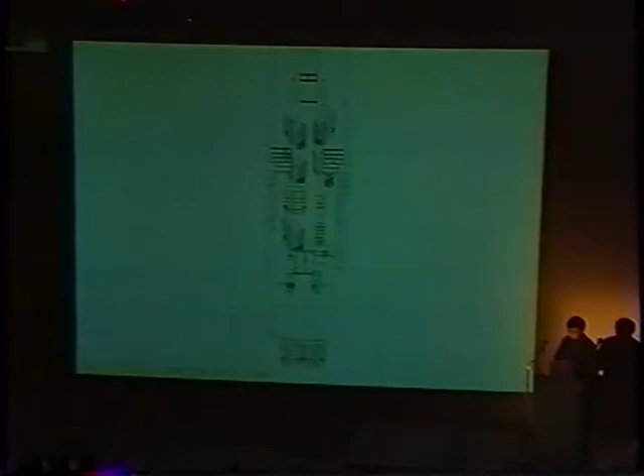This is a bookstore we did using a similar way of thinking, starting the project with a program. Since it was an interior design project, we looked at the old drawings and found out the space we used for the bookstore was originally meant for traffic.

So what we did was put traffic back into the space. We had bicycle wheels put onto bookshelves, so they were nicknamed book bikes. This is one of the details. One of the biggest problems we have in the office is doing nice details, but this one is so far the best because we didn't have to do anything—they were bought off the shelf.

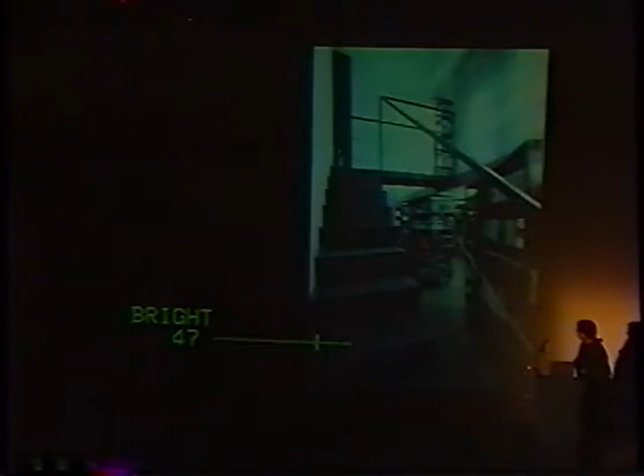Here are some interior shots. The pivot in the middle of the book bike is actually the column supporting a mezzanine. So you can go upstairs to the mezzanine level, and there are lighting fixtures there and in the walls, so it becomes a big lantern in the bookstore.

The book bikes revolve when the bookkeepers push them, so they're able to reorganize the space inside. They were even used as the door of the bookstore.

A little over a year ago, the bookstore was demolished to become a real passageway for bicycles and cars. So for us, half of the bookstore is gone—half was books, and half was traffic—and it's still there, or we like to think that's the case.

Here it's a similar idea, not with bicycles, but with how people may use the space. This is an office for an American diesel engine company, and it's a critique of cubicles. We decided to fully take advantage of the open space. The lower half of the office is opened up by dividing it with clear glass, and the upper half with translucent glass. So when you sit and work, you can see the entire office through the window. When you get up to go to the bathroom or get a cup of tea, you have some privacy.

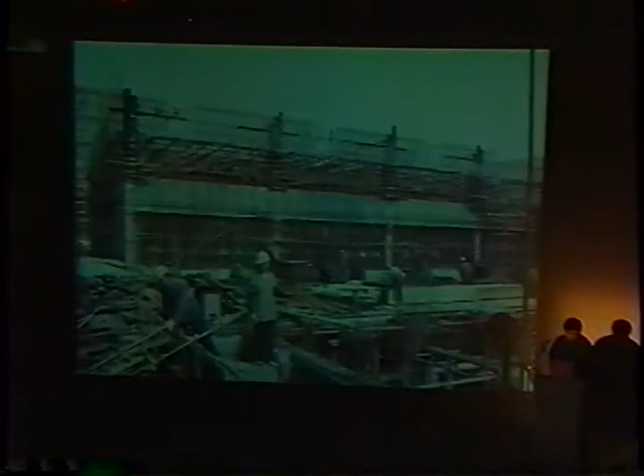And then we could develop urban spaces again. This is a garden which also serves as a fire escape. So now it's under construction. You don't see much of it yet, but this is the basketball court. It's already topped out, I just don't have the image here.

So here we're onto site. Site is, of course, terribly basic in architecture. We are taking on the issue in a number of ways. This is a renovation of a building which is not quite finished. Something happens also very often in China - an old building means a building built maybe 5 years ago. In this case, right before this residential block was completed, we were asked to redevelop the first floor into an office.

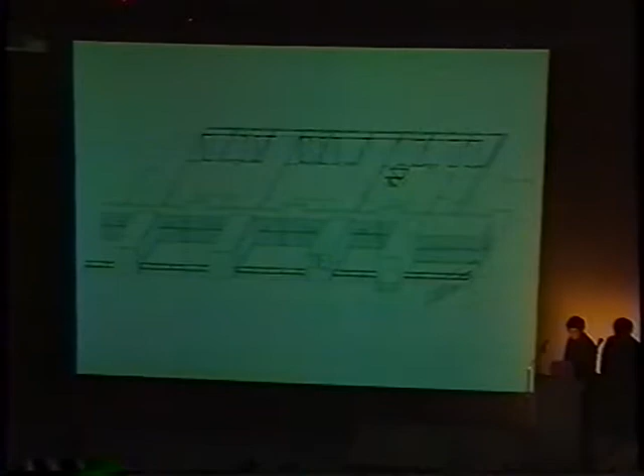So as a residential block, there's a gap between the street, the sidewalk, and the building, and there are bridges to enter the residential block. Since it's now an office, we tried to bring the building back onto the street by turning the bridges into a showcase office. This is an office for computer rendering.

Their clients are architects. So the idea here is the office would be where the client meeting would be held. When the client is looking onto the computer here, passers-by would have a chance to see the beautiful image on the computer, and then they would go in and order one themselves.

That, of course, really never happened, because there aren't that many architects going by there anyway. Instead of changing the building, we also added pretty much a skin to the building - perforated aluminum panels. Behind it, you can still see the original window and air conditioner unit. And you can see here the gap, and this is part of the bridge structure.

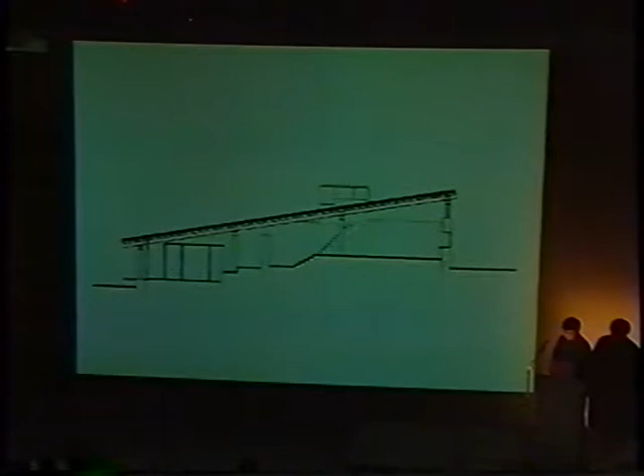And here, site is about topography. This is a house we did in '98, on a hillside. In fact, it was a farming field during the 1970s for a while. We understood that the reason the client wanted to come here was to be with the really spectacular landscape.

So our building, which is here, is about how to bring the people and the landscape together. We kept the different levels of farming terraces inside of the house. And then on the outside, the big roof, in fact, has the same slope as the hillside, which is 11 degrees.

In the courtyard, and on the inside, we had a number of little buildings, mini buildings again, which are serving as the dividing walls. This is a 1.8 meter wide wall, but the inside is carved out to be bathroom, storage, fireplace, and so forth. These are the staircases going to 3 guest houses, like cubicles - if you remember, you actually saw them early on. See the different levels inside of the house.

And then from those penthouse guest rooms, you have a view again of the landscape. That was winter, the previous shot, and here is summer.

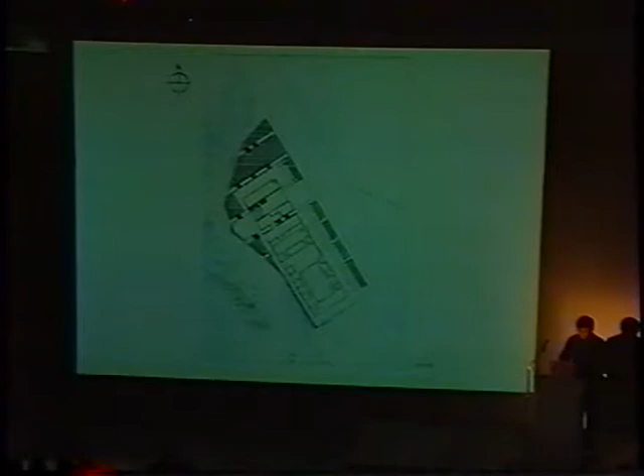In this case, the site is right on the Yangtze River bank in Chongqing. Our site, when we got it, had already been totally flattened. We were asked to set back from the river for a biomedical research and production facility. So this is a view from the river.

What we decided in this case was to engage the river, or the topography, only in certain places, or rather say in certain sections. So these are the view tunnels as well as pedestrian access to the river. Because of that, we were able to convince the client to take out the typical wall periphery and the gate, becoming one of the first - actually the first - open complex in the area.

And then again, we offer some views through, on the first ground floor only. This is the production laboratories, and then research laboratories on the upper level. And this is the riverside.

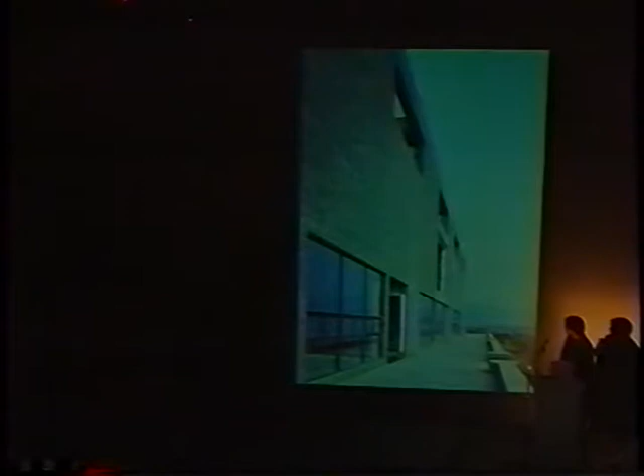And here are one of the courtyards on the top level. For us, this is just one layer of the artificial topography. And that's inside of the lab. There's actually a real person working there.

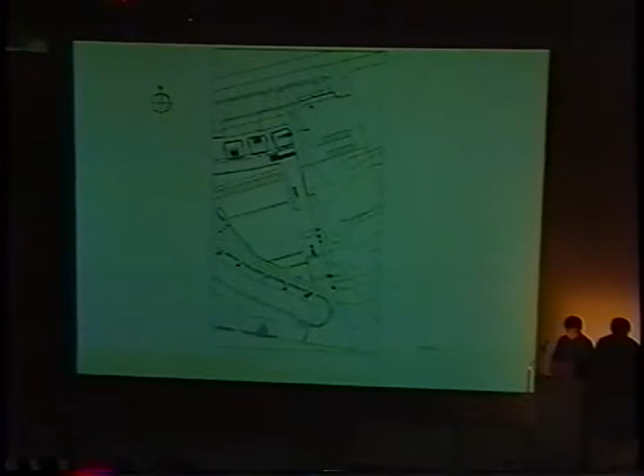So the next project is in Qingdao, a city everyone here must be very familiar with, where the beer is from. The brewery is not far from here. Our project is on this hillside facing the ocean. It's part of the Pacific Ocean, but this immediate area is called the Yellow Sea for us. The building, the conference center for Peking University, descends from the access road all the way to the ocean front.

There were 5 so-called villas of the European classical style, which is a lot more awkward than these buildings here. They were abandoned by a Hong Kong or Taiwanese developer, I don't quite remember. But we came in and tried to make them part of the facility as well as part of the topography.

So that's the building per se, and the staircase on the terrace roof takes you to the ocean. These are the one-time villas with faked pitch roofs, ionic columns, and all that. Since none of those things were structural, we just cleaned them all out.

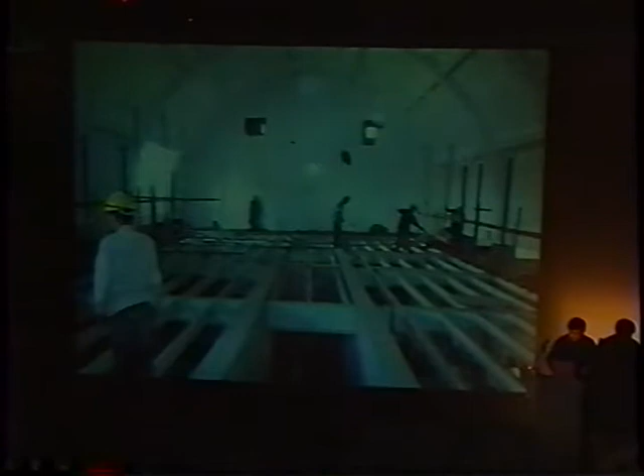So the building is freestanding, and here is the 4.3 meter gap between the existing structure and ours. The reason we're doing these concrete walls is to give enough distance between the footing of the old columns and our structure.

And here is the ground level, looking up. The instrument, in fact, is a really amazing piece of machine. It costs about $8 million, but it looks like a little boiler you'd see in a suburban bungalow.

And this is another factory we converted into an art center in Beijing. Sorry that I'm rushing so much, so I'm not giving you all the information about the social aspects of some of these projects. Like this one, the art center is supported by a government-owned developer who wants to use avant-garde art as advertisement.

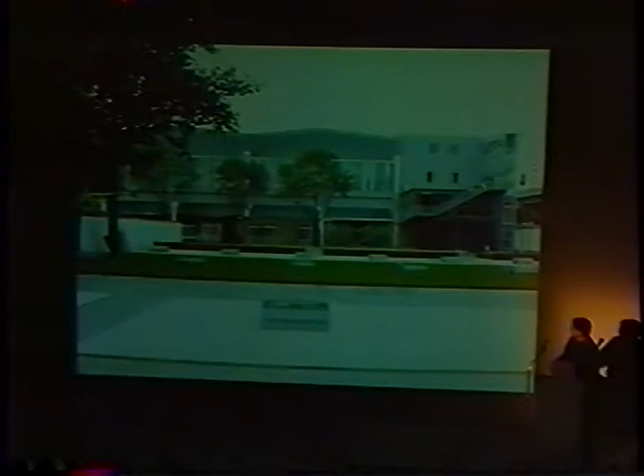And then we developed a garden, an old textile factory in this case is being renovated. Half of the factory, however, had to be cut off because a new road is being planned right next to it. We decided to keep the cut as much as we can, so instead of an elevation we had to design, we just show the section of the building.

So here it's literally a section. And that's the inside. In case you have a question, all the materials you have seen so far are all manufactured in China. The U glass channel was a German technology, but now it's made in China and very inexpensive.

And this is one of the events. It's a dance which was performed by construction workers and professional dancers. Now the developer sold out all the apartments, so I would assume that art did help, maybe art and architecture.

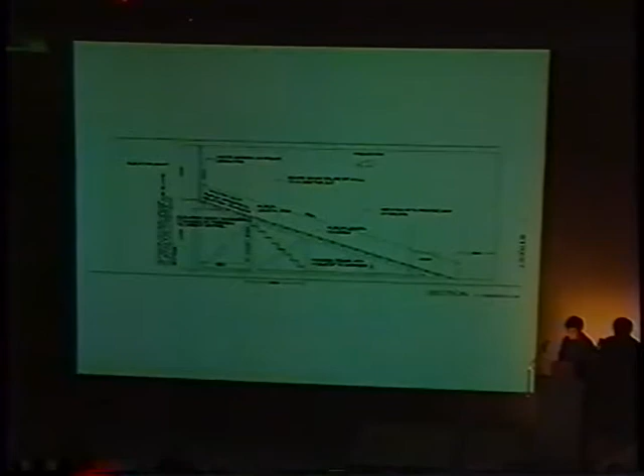And we are also interested in artificial terrain, which of course is something probably now being heavily researched and practiced in the Netherlands. But the reason we are doing it is quite different. This is an exhibition we had in New York about 3 years ago, where we in a way entertained such an idea. But the reason we are doing it in China is precisely because there are so many sites that have been leveled for, or in the name of, development.

Now we'd like to, whenever we can, reconstruct them. Of course, not only putting the soil or rock back, but using architecture somehow as a way to make the reconstruction or restoration happen. So here is the exhibition of our work in New York again, and one of the things we discussed is this idea of artificial terrain.

So that's another notion of site we have been working on. The projection shows some of our projects, with the idea of this ramp going up, so you end up going from New York to Beijing, as was the idea. Map of Beijing.

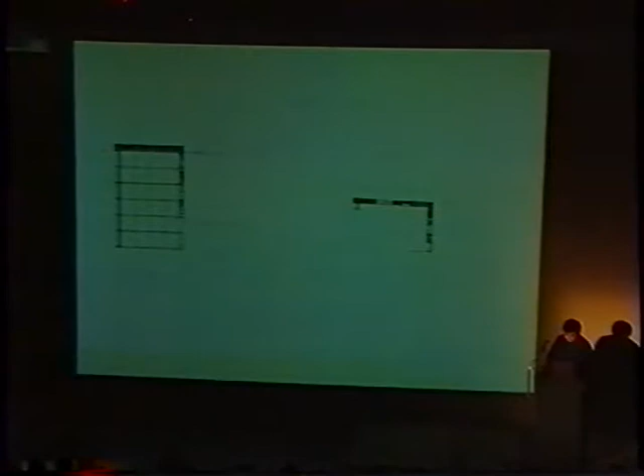Okay, I'm going to talk briefly about tectonics, and I'd like to use some student projects from Peking University as examples. We've only had two years so far, actually a year and a half. For the first year we had design-build projects. The first one was to develop a wood workshop next to an old building we occupy.

You see the students here in action, doing homemade lamination. They laminated plywood together to use for structural purposes, then put it together. There's a steel plate there in case you don't see it, because I don't see it. And so that's the finished product - a little shed.

Then the next class looked at the building and started to design the insulation for the translucent roof. That's the roof before the insulation was put in. The students decided to use emptied mineral water bottles because it would give good insulation. They tested it, it was very good, and it would still allow light to come through. So ever since, we were drinking mineral water like crazy. Once we consumed enough, they were able to put it all together.

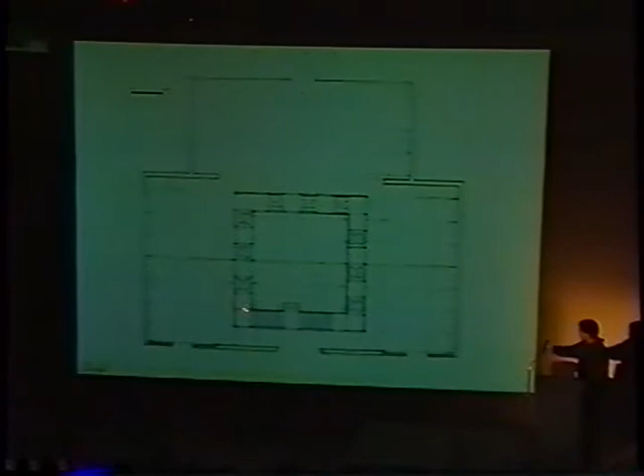So in a very simple way, we did some initial experiments in exhibition designs. This one happened at the Vienna Secession, for an exhibition called Cities on the Move. What we did was carve out, in a very straightforward way, a courtyard in the middle of the exhibition hall. All the exhibits were pushed to the periphery, with the void in the middle - this is on the outskirts, and that's inside the courtyard.

The courtyard is used for the audience in case of a performance, and it's also used as the stage and as a place for reception, press conferences, and so on. Then we cut holes on the second floor to invite people to exhibit their voyeuristic nature. This is not a real person - this is an artwork, looking at late November in Vienna. So this is real, and this is a real person peeping into the space.

We also tried to engage Chinese characters, the pictographs, as spatial diagrams. For an exhibition at the Architectural Association in London, I picked these three words not for their meanings, but for the way the space is organized in each of them. They were built as suspended partitions. Then a Singaporean architect did the floor platform also with Chinese characters, and a third architect did neon lights. You see a bit here, which is also one Chinese character in a very loose sketch style. The word turned out to be his surname.

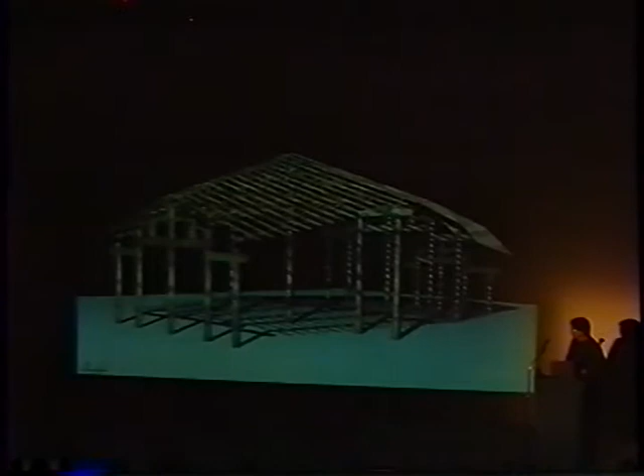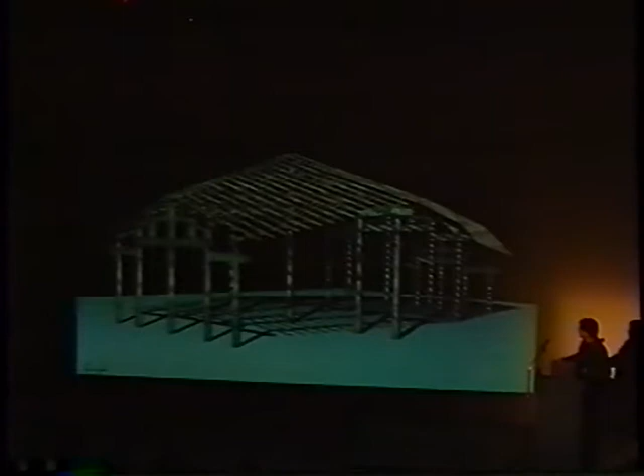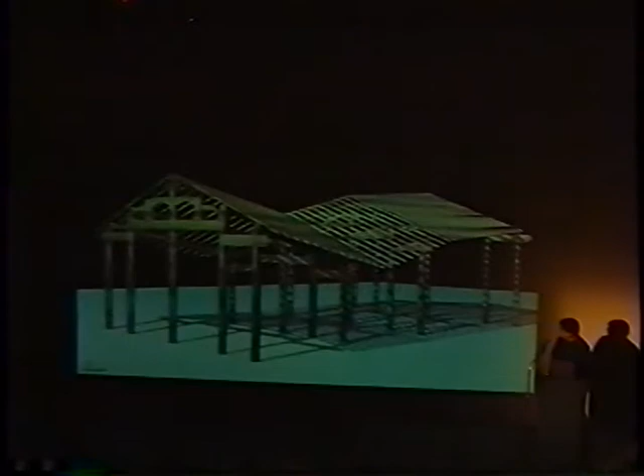Meanwhile, we are thinking—I had a meeting with him recently, so the project will go ahead now—of using old materials taken from the demolition site of old buildings. Since these structural frames would have different sizes, the roof would go according to the dimensions of the available material. So it's more of an experiment in that regard. And in the city of Quanzhou, there's a tradition of reusing and recycling brick and stone in a particular way, so we would engage that tradition as well.

The reason we have the building placed in a landscape painting, not a real landscape, is because the site of the project changed God knows how many times. By the end of last year, I told the client, could we just work with the painting for the moment, because there was not a fixed site. Now we do have a fixed site, so the next stage we'll be working with a more real site.

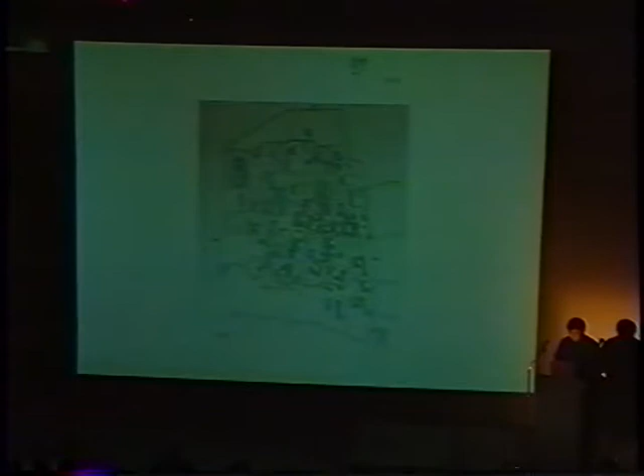The reason he didn't have a site is because the city government thought our artist client had a kind of commercial ambition. So for any site our client was interested in, the city thought it would be better to develop something instead of giving it to him. Now, of course, things are changing very fast—cities are starting to understand that having a cultural dimension would help more than just having another shopping mall or condominiums.

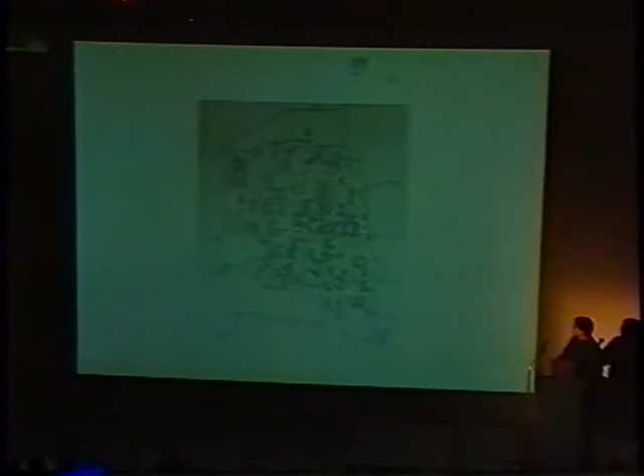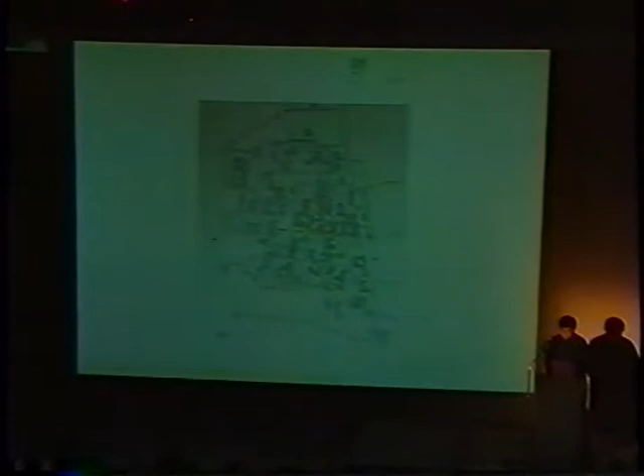And here is another effort we're trying to put together, to engage the still available traditional crafts in a certain area. This is a very remote area in the south, an existing village built about 700 years ago. We're doing something in the backyard for the richest resident of the village, who returned to build a house. Here, the courtyard becomes something continuous from one space to another.

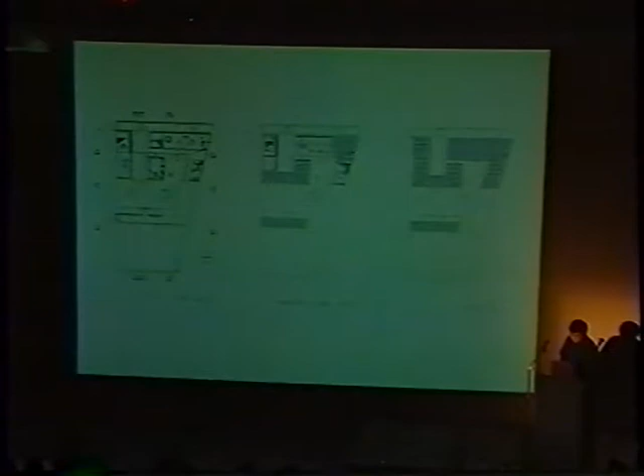And again, the roof form will use traditional technology, but won't look the same. This is a house right outside Beijing, for speculative development. It seems it's going to be duplicated in a number, so we actually prepared the design so it could work with different geographical conditions. This is the one we are building now, but a number of other possibilities will be built later on.

We're still interested in a courtyard, but this time the courtyard is made by mountains on half of the enclosure and buildings on the other half. This is also a building built with earth and wood—the earth will be rammed earth, and the wood will be laminated plywood. This is a model, and that's the rammed earth wall. Now we are starting to construct the plywood frame inside. I think I've done this a little better than my brother—if you remember, his outhouse was done with a similar technique.

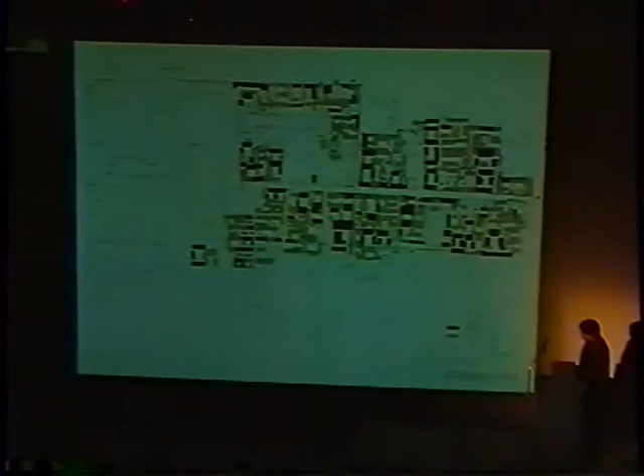In this case, we're saying there's no way we're going to go for 5. We should be very sensitive to the historic context, but we have to let it grow—maybe just double the density, so this is a 0.7. We studied the existing courtyards without buildings, and a study of buildings without the courtyards. This is our proposal so far for the new density.

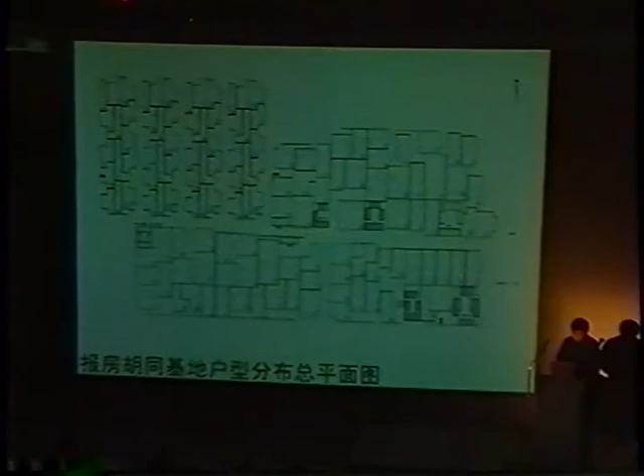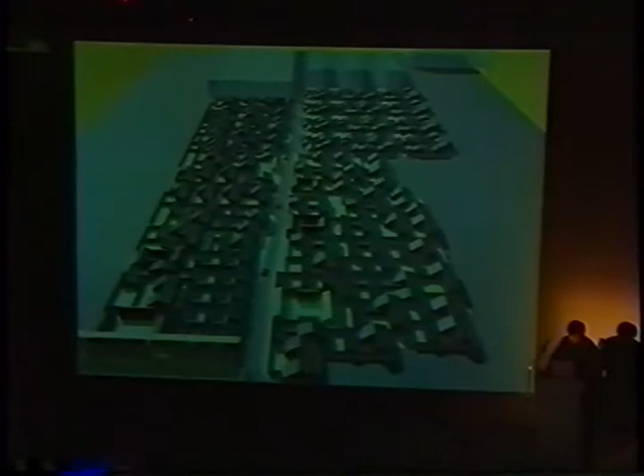There are certain operations being done—the courtyard house in China literally meant a four-sided house. We're taking some of that off, making 3-sided, 2-sided, even 1-sided houses. We're also narrowing down the front of the house, making a narrow courtyard house, like the tall building I was talking about. This is one of the current projects—130 houses altogether, next to Wang Fujing, the number one shopping area in the city. Of course, for very rich people.

When I started to talk about space, people probably realized right away I'm not talking about things as basic as some of the other things I discussed earlier. I started to relate space to tradition, maybe a kind of regionalism. So the question really is, can we be so basic? After all, I'm not so sure—with all the important issues pressing on, a lot of times I don't know if we can stay simple or basic. The whole issue of bamboo, of course, comes from ecology, although I don't think we've gotten very far.

We have done a number of experiments, starting urban research on bamboo as infrastructure, because our interest in bamboo has to do with two facts. One is that bamboo stems develop into a network—it's not a singular plant, but a system. So it's possible, if you control the growth, it would grow into other infrastructure and relate all the greens in the city. The second thing is that bamboo, to grow to its full height, takes very little soil—about 50 to 60 centimeters to have 6 to 7 meter tall bamboo—meaning we could possibly grow bamboo not only on the roof but also on the elevation of the building. This is some of the early studies.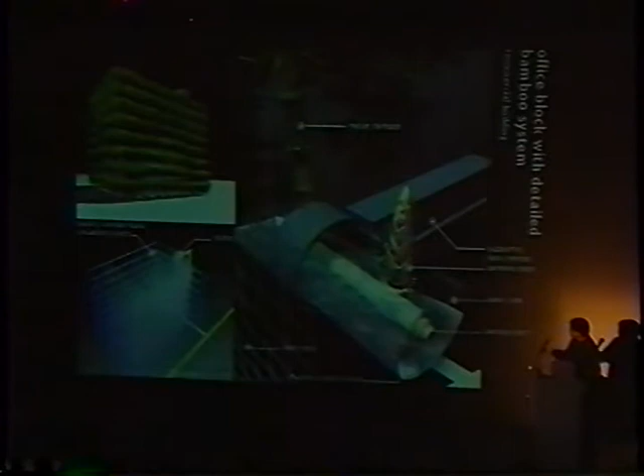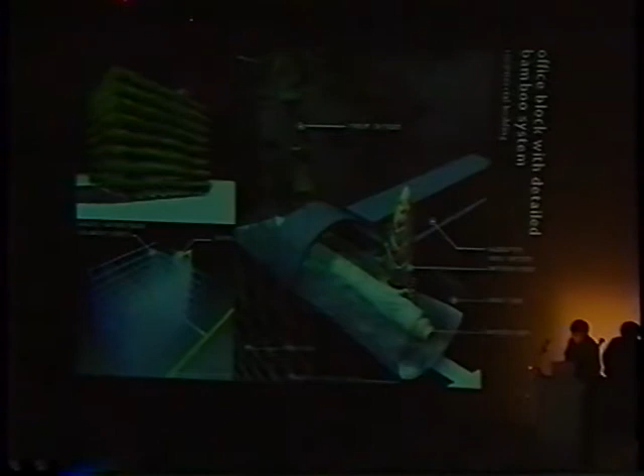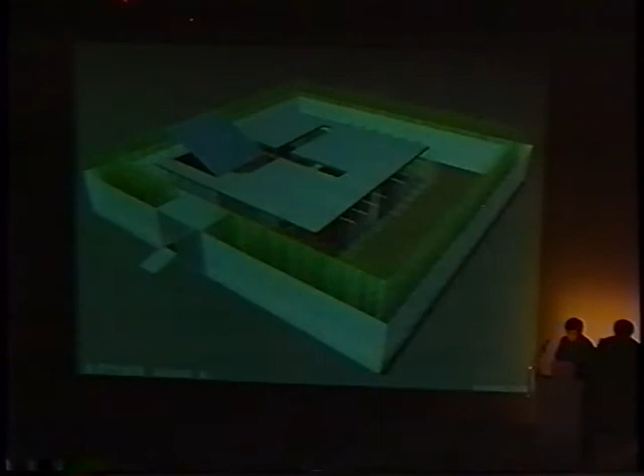And here is a model house in Beijing, using bamboo again as part of the architecture. It didn't turn out quite right, but you can see the courtyard in cruciform in the middle here.

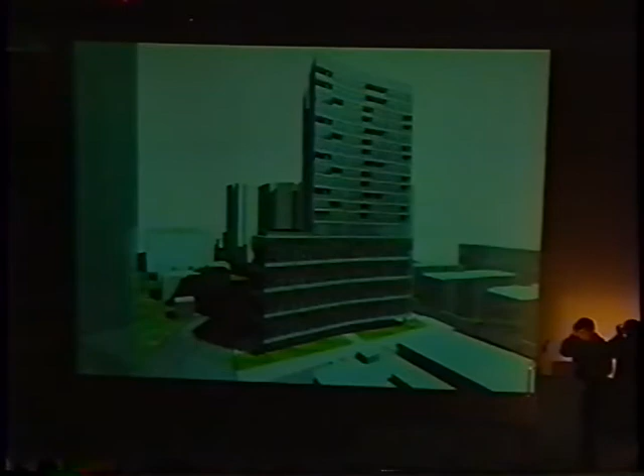And this is a bamboo tower, our second try, this time in Shanghai. The project is in the Planning Bureau for approval, a work-live tower. So when I go back to China, I will know if it's being rejected by the city.

And the last part has to do with city, because one of the questions I have had all along is this: if there's no contemporary Chinese city, how can we have contemporary Chinese architecture? It's like if we could have Chinatown in New York or San Francisco, but they are not Chinese architecture in a Chinese city. How can we really define a contemporary Chinese city? Apparently, I don't really have the answer, but now we have opportunities to work on large-scale urban projects.

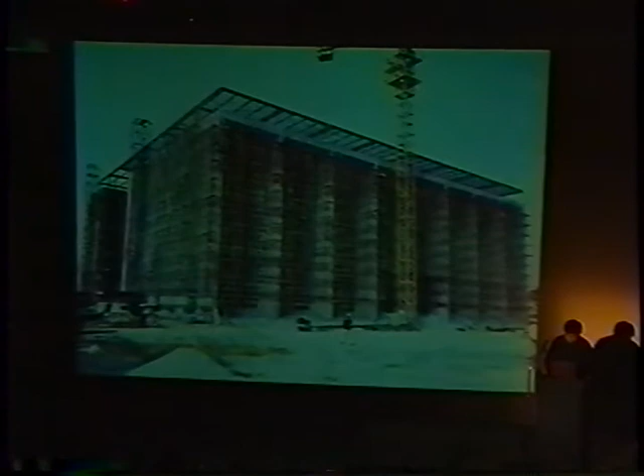That's what we thought. So here is the stage and the lighting tower for the stage in the park area, under construction. They had the first Cantonese opera last week on the construction site for the Chinese New Year. And here is the city hall, town hall. We developed a sun shading system on the elevation and on the roof. This is actually aluminum louvers, you can probably see.

And this is another urban project. This is about 200 hectares of land in south of Shanghai, where there is a lot of water — about 40% of the land is covered by water. So there's a tradition of having real water towns, and we decided to try to interpret that tradition with our version of a water town.

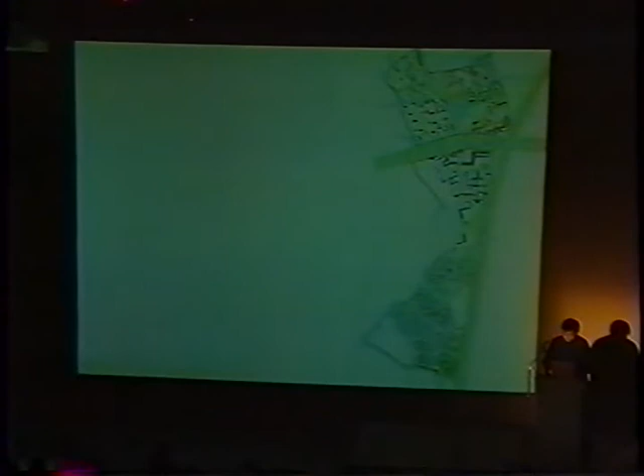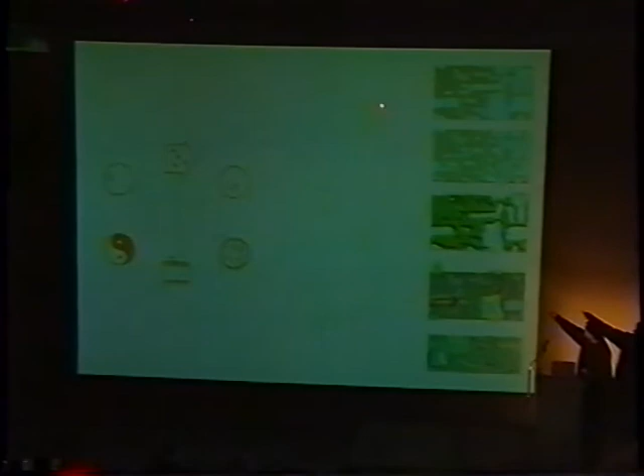The way we have been working is this: we picked six primary factors for the site — water and transportation, circulation, vegetation, density and buildings, and ecology. Then we make them into pairs, and have done studies of each pair.

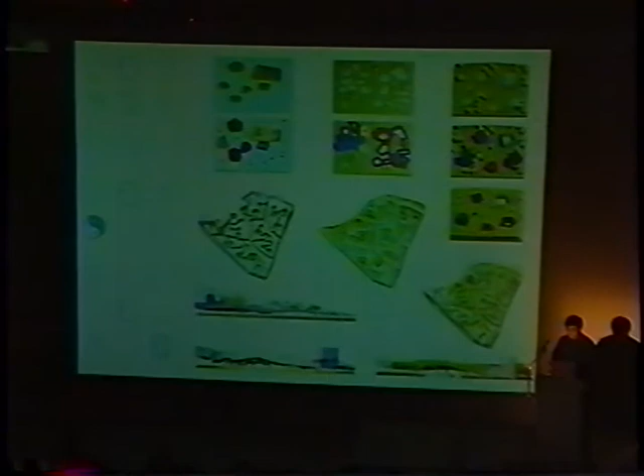So it's like water with circulation. And then this is water with circulation, and water with ecology, looking at different ways of using the water. The water has been used for circulation, meaning we have boats and water bicycles going in the rivers, but there's also an ecological system as well, and also a system of landscape.

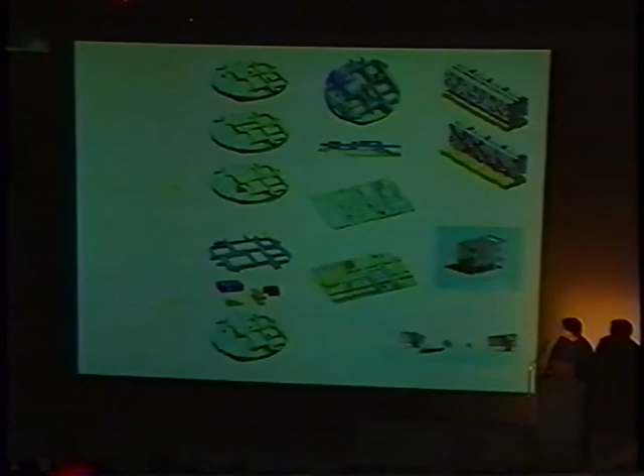More study is water and building in this case, and vegetation and building. This is also an ongoing project. Our client, the developing company, is now fully behind us, so we are going into the stage of negotiating with the City Planning Bureau, which is no fun, but part of the work anyway.

And then about the users on the site, the different types of people. For each type, we plotted out his or her relationship with the different spaces, as well as different user groups, and his or her daily routine possibly through the site.

And now we are breaking the site down into a number of areas, building up what we call the idea bank. In this case, the client would have a hard time to really reject the entire scheme. Usually if he doesn't think something is quite right, we have a number of backups — we just change that fragment.